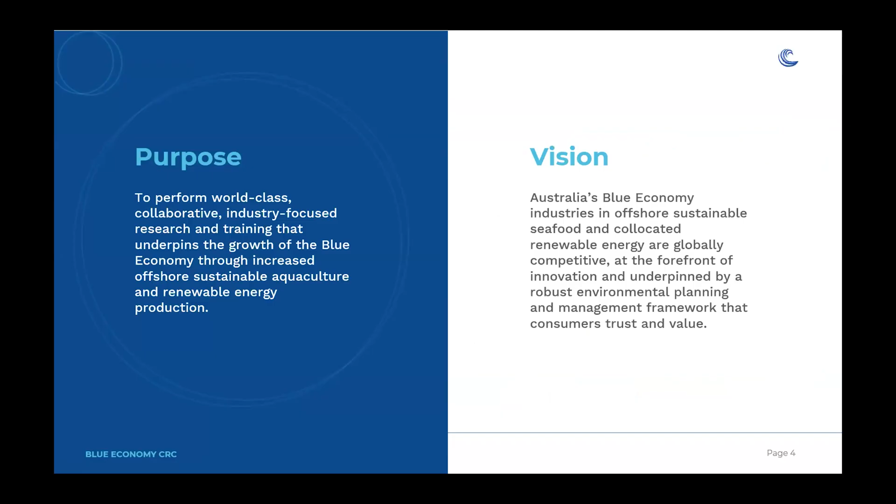Onto today's webinar. It's basically a rerun of 4 selected presentations from the European Wave and Tidal Energy Conference that took place earlier this year in Portugal. The EWTEC conference series has been running since 1993 and really is the premier biannual event on marine renewable energy that attracts developers, academics, as well as government from across the globe.

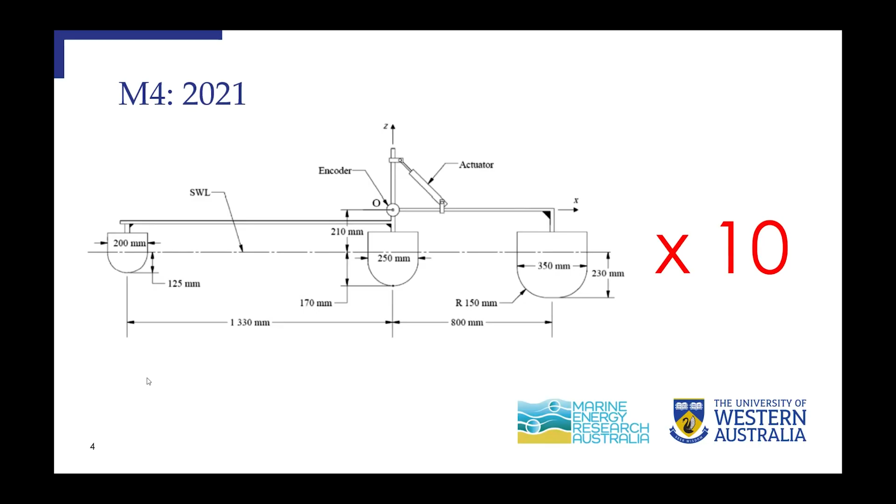So that's a bit of history. We started thinking about deploying an M4 reduced scale in real sea, I think in 2020. Then in 2021 the project was approved, the proposal was approved by the Blue Economy CRC. The idea was really quite simple. This is a sketch of M4, which was tested in the lab, and the idea was to scale it up 10 times and deploy it in the sea. Of course, along the way a few things have changed, but the main dimension remained the same. So that's how it looks like after some design iteration, before going to the sea, before it is built.

If you notice, we have actually made the float slightly taller. The idea is because we have a bit of a payload to sit on top of the device, and we want to provide enough buoyancy just to accommodate those equipments and power electronics and so on.

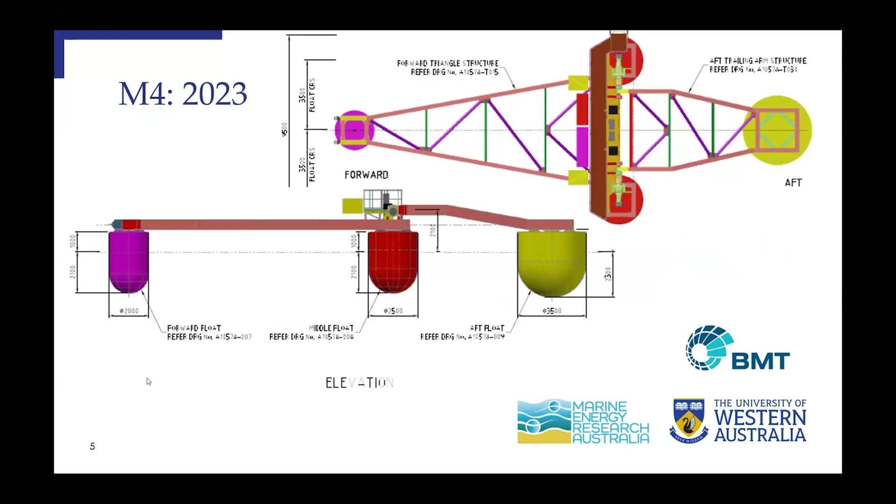Next is how the device looked like when it was constructed. This was at the time of launching. The total length is about 24 meters and the total width is about 9.5 meters. Some simplification also, if you notice here, instead of having rounded floats, we have it segmented in polygons, just to simplify the fabrication.

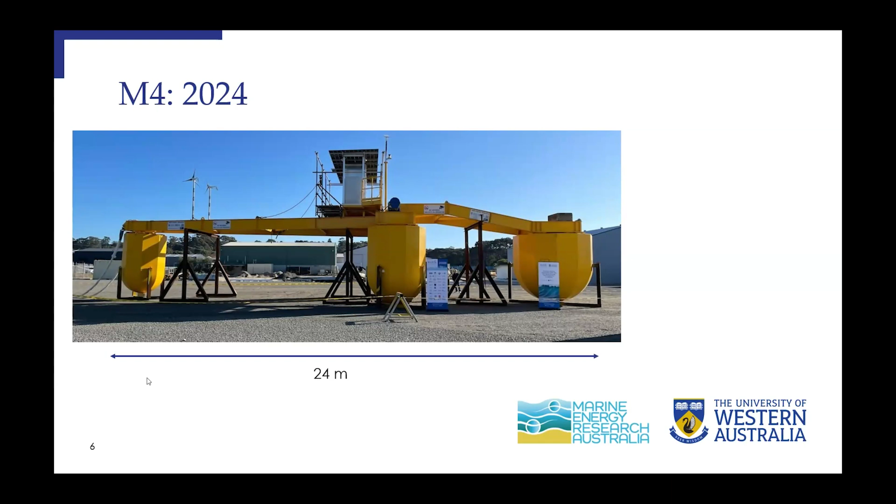So where was it tested? It was tested in King George Sound, at the outer harbor of Albany. And where is Albany? It is about 400 kilometers southeast of Perth. That's the map of Western Australia, and that's the location where it was tested. If you see here, it is actually protected by a headland.

So there is a thin strip of land connecting this peninsula to the rest of the continent. The water depth here is about 13 meters, so not very deep. And what is important here is that because of this headland, the site is actually sheltered from the more energetic swells from the Southern Ocean coming from the south, which makes it ideal as a test site for a reduced scale device.

So we are looking at a scale of about 1:5 to 1:10 relative to the more exposed site where you may want to deploy a full-scale device. And again, because it is protected from the swell, the condition is mainly dominated by wind waves, which come from the east in the summertime. So that's when we are targeting to deploy this device.

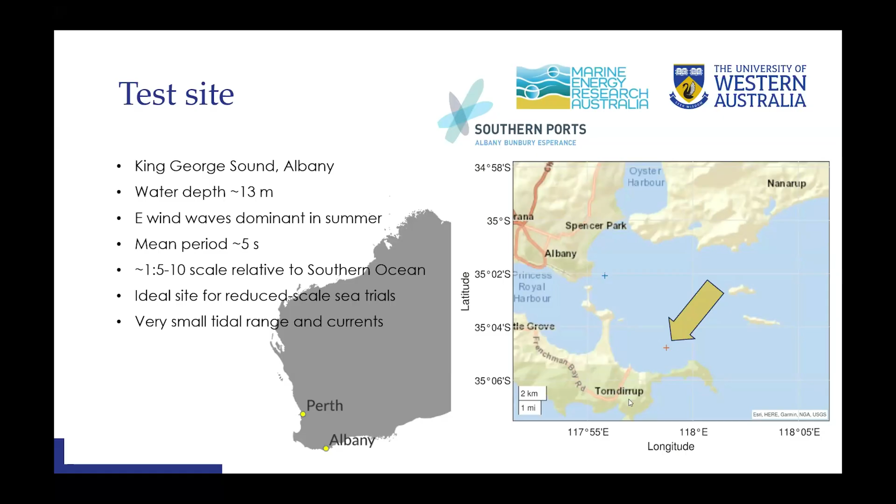So this is just a zoom in of this little section here, looking down. If you see here, there is a little island called Seal Island, and that's where we deploy the M4. It's just close to this island.

Okay, so the mooring system, it is quite simple. This is just a schematic, not to scale. So 2 hawser lines connecting the bow of the M4 to a mooring buoy, and then from the mooring buoy down to the seabed we have just a single riser, which is pretty long, and then a series of clump weights and 3 anchors.

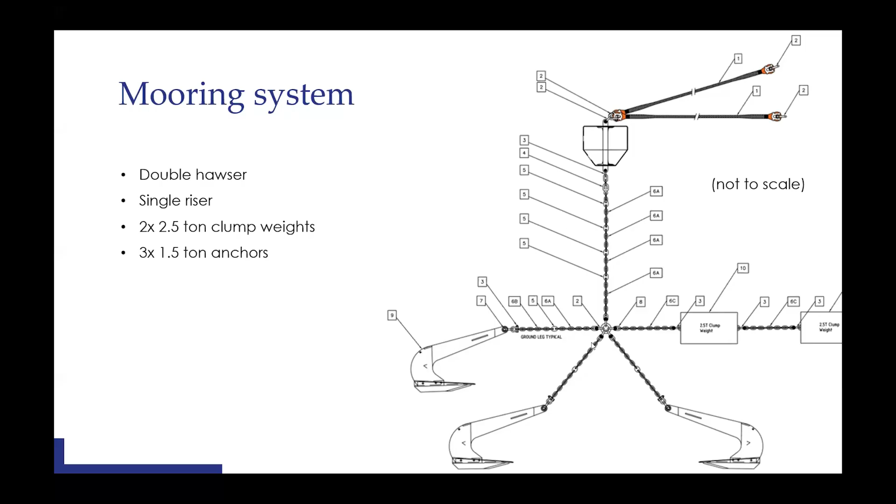Okay, so the timeline of deployment - roughly it was a year ago that we deployed it, so 8 November last year. And then we finally towed it back at the end of April this year. But 2 times we took the device back to shore to do some inspection and maintenance, though they were all pretty minor. The first maintenance we did was just to replace an encoder coupling, which was damaged during one of the energetic sea states that we encountered.

And then the second time we pulled it back to shore, it was to fine tune the measurement of the angular speed of the generator, related to the control aspects. But structurally, it was performing well and sound. The paper that we presented mainly focused on the first 2 deployments, from November to February. Most of the time, the power takeoff wasn't active during this period. Only at the 3rd deployment, which was the longest, did we try to generate and activate the power takeoff and generate some electricity.

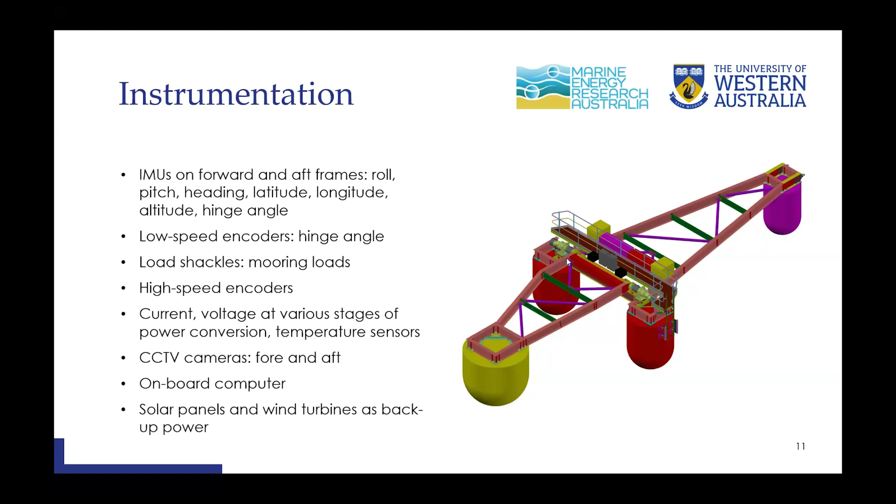We also have solar panels, which you will be able to see later on, and a couple of wind turbines just to supply backup power to power the sensors and so on.

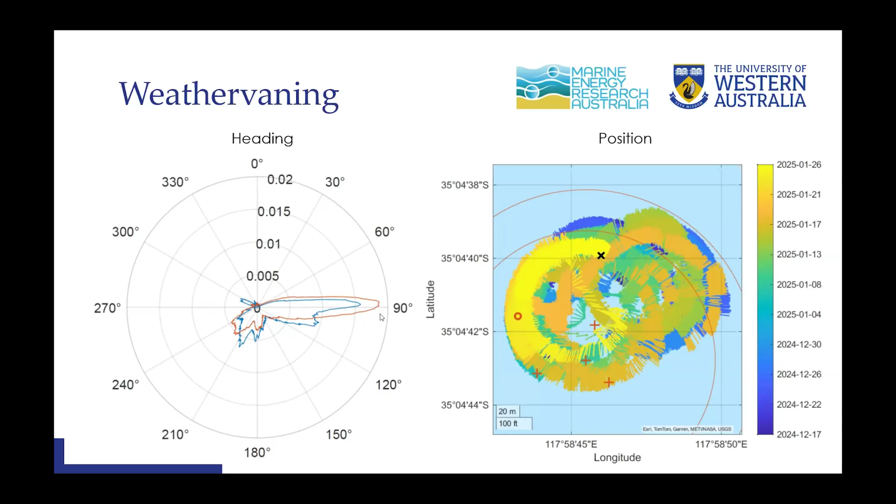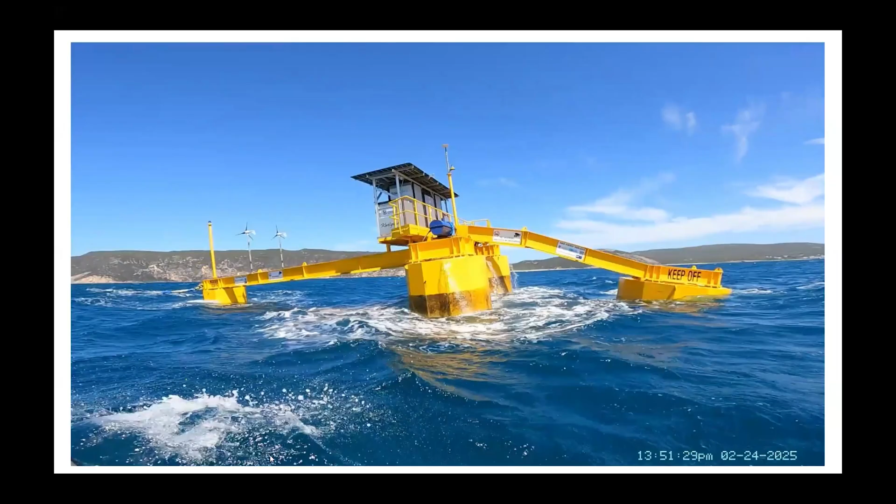So this is a video of the M4 in action. You see this, I mean, the condition was not particularly energetic, but still you can see quite a large motion there. And just the noise coming from the gearbox, which is pretty loud. You see here, the one in blue is actually the housing for the gearbox and the generator. And on top here, you have the solar panels.

And you can see the hawser and the mooring buoy in front. And you can see from time to time, the floats actually get slightly submerged.

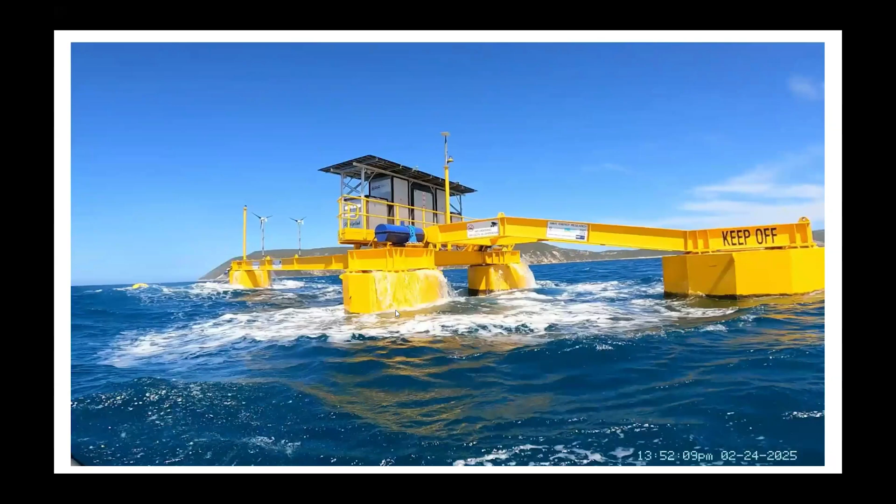Okay, so we have developed a model based on linear theory. We develop it in frequency domain, where we use a generalized mode feature to model the additional degree of freedom of the hinge. So this model is able to take spread forcing as input, and then outputs the motions as well as the loads on the hinge.

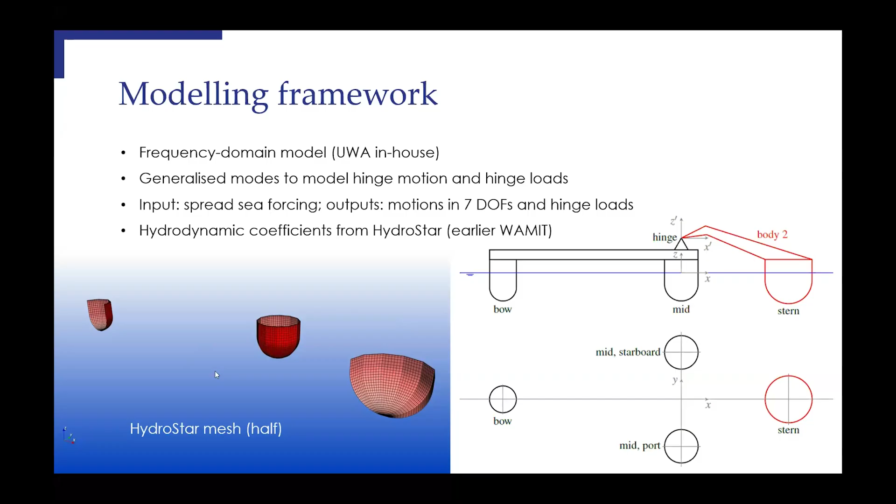This is just showing the mesh for Hydrostar, utilizing symmetry of the device. And we also conducted some tank testing at AMC in Tasmania, and these are just showing some comparison of the measurements we obtained from the test with the prediction from the model, showing quite good agreement for the motion response amplitude operators as well as the power function.

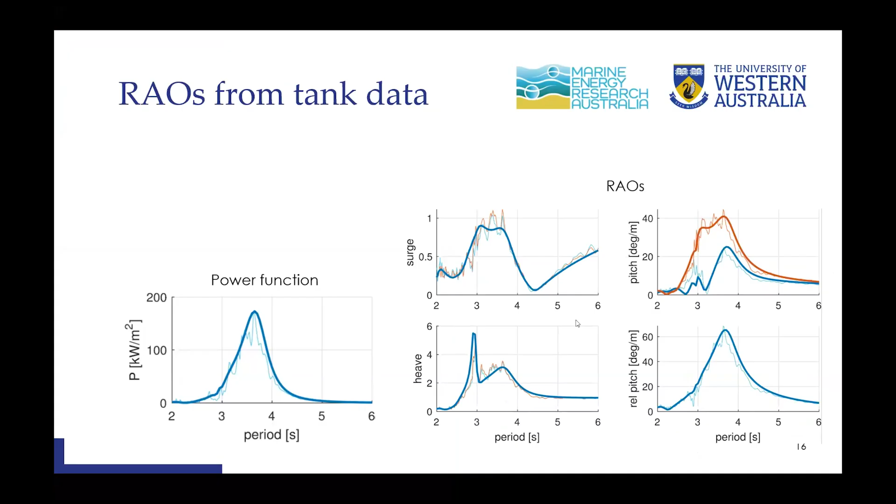But the question here is that we do not know the two-dimensional spectrum, because it is a function not only of frequency, but also direction. We do not know this from the field. We know the wave spectrum in 2 dimensions from the wave buoy. So we cannot actually obtain the RAO simply by utilizing this relationship.

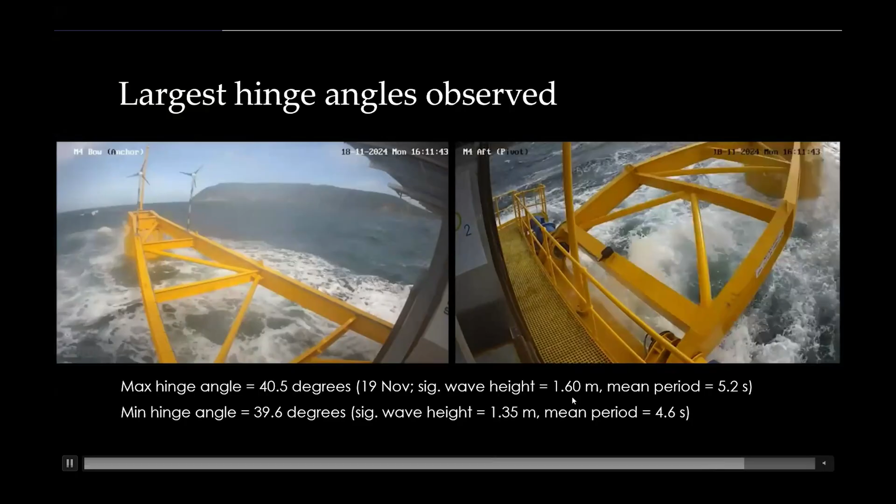Okay, this is some footage from the CCTV cameras. Yeah, this is one of the highest, actually the highest hinge angle observed, just 2 weeks after, well, less than 2 weeks after it was deployed. And you can see here the significant wave height is not really extreme, but because of resonance and the condition was just right to create such a large response.

So one time we had to call the tugboat to release this hawser. But I think another time when this happened, it managed to unwrap itself. But of course, this is not something desirable. So to prevent, well, we can't actually prevent that from happening at this point, but to prevent this rubbing against the float, we install some kind of sleeve to protect the hawser.

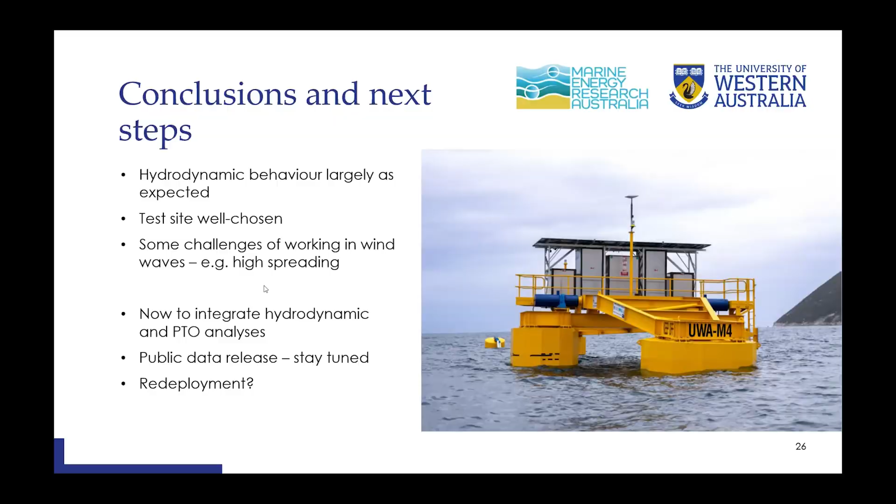Yeah, thank you very much.

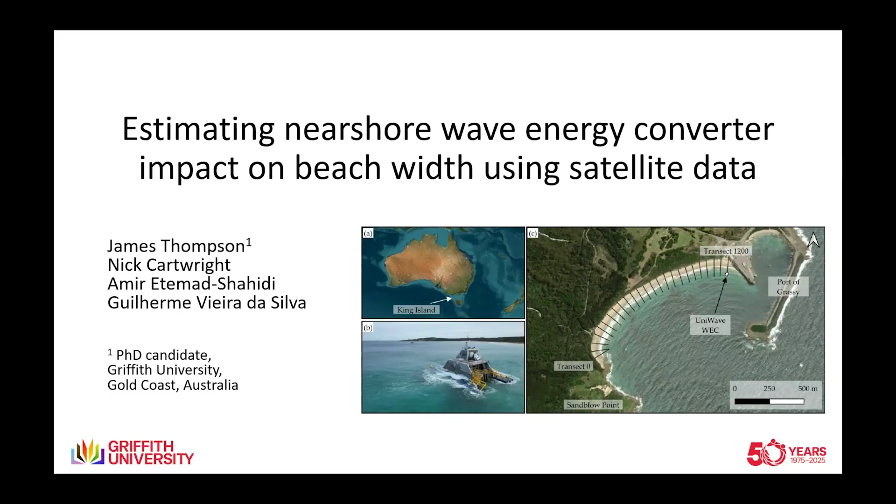I was lucky enough to present this in Portugal this year and learn a lot from all the other experts in Europe and in Australia and all over the world. And hopefully I can share some of the work from my team today with you guys.

So looking at the coastal processes along our coast is really important and how they impact our beaches. So this study looked to merge those ideas, looking at wave energy converters and their potential coastal impact as an important part of understanding how they might affect our beaches.

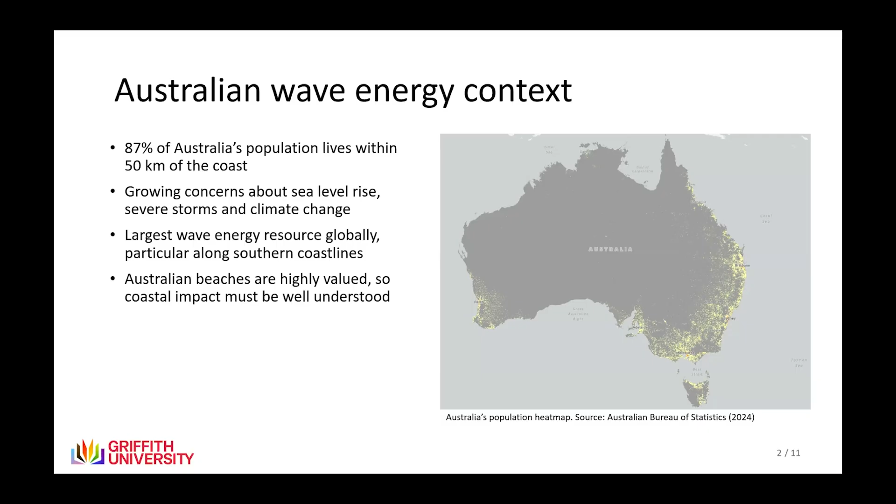We wanted to take that further and look at the potential effect on the beach, things like longshore currents, sediment transport, and beach width.

The review studies out there have quite differing opinions on this space in the field. Some studies think the impact on the beach is pretty negligible and not worth considering much further, as wave energy converters are really small at this stage.

Other studies have investigated wave energy converters as potential coastal protection structures, inherently suggesting they will have a significant impact on the beach, whether positive or negative for communities. So we wanted to get some measured field data, and found an opportunity in a recent Australian deployment to investigate that.

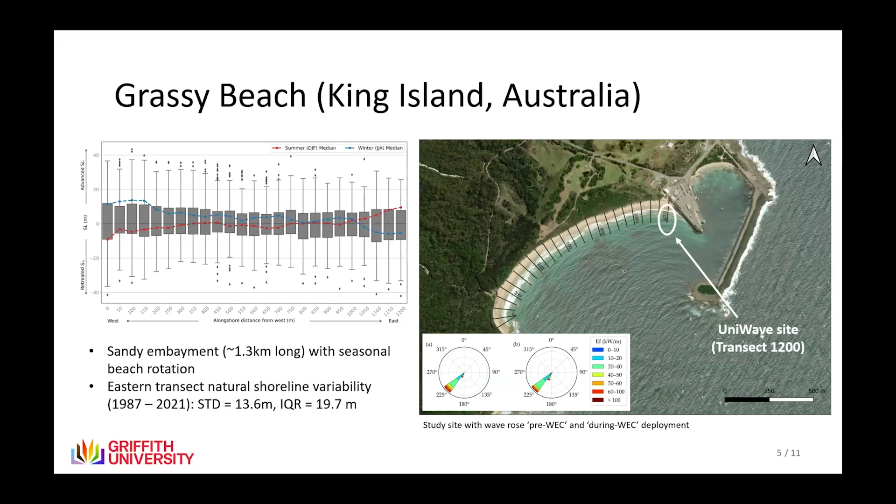A little bit more into the methods. Sadly, we weren't able to go down and measure this beach change in person - quite a costly place to get to with a PhD budget. But we were able to employ satellite data, which gave us a really good long data period from 1987 through to the present day.

With accuracy of about 7 to 13 metres of beach position, we used 556 images from September 1987 through to the end of the deployment in March 2023, to get a good idea of how the shoreline naturally varies in the pre-WEC period through to how it changed during the WEC period of 2021 to 2023.

Measuring the shoreline was done using a Python toolkit called CoastSat, and this looks at each pixel of the satellite image and distinguishes whether it's likely to be water, sand, or white water. By doing so, it's able to draw a shoreline along the beach.

As I showed before, we used 25 transects along the beach to get an idea of the cross-shore change over time for each position along the beach. And then for the transect of interest, the one behind the wave energy converter, we decided to do some detailed statistical analysis to compare the pre-WEC period to the during-WEC period.

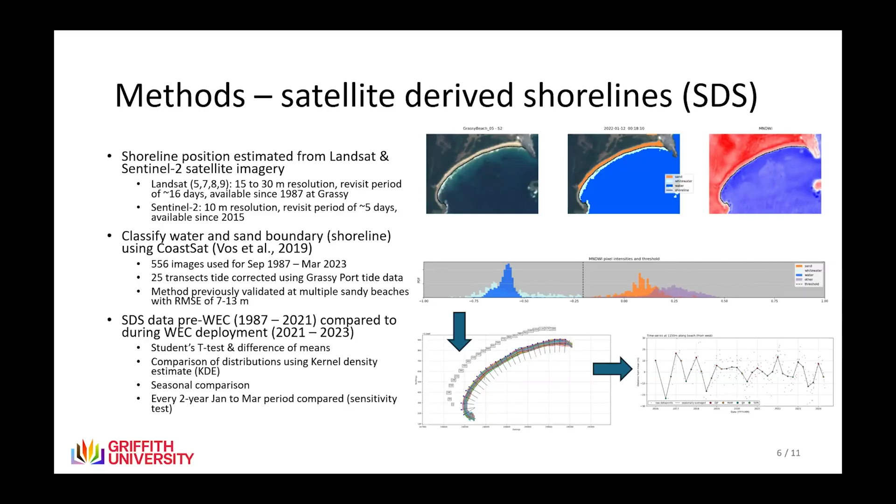Jumping straight to the end result, we did see an increase in beach width behind the structure, as one might expect with placing the structure in the surf zone. It was a 5-metre change between the mean of the pre-WEC period and the during-WEC period. So the beach became wider in that zone.

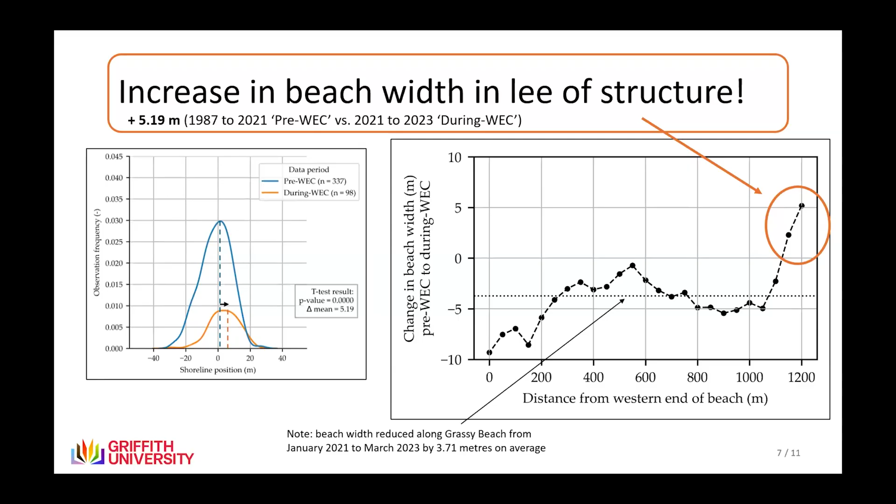We then wanted to investigate this at a seasonal scale. We know from the natural variability study that there is a significant difference each season in how the hydrodynamics affect the morphodynamics of the beach. But this result held up across all seasons, with all seasons showing an increase in beach width behind the wave energy converter, in particular compared to the rest of the beach, which generally became narrower during this 2-year period.

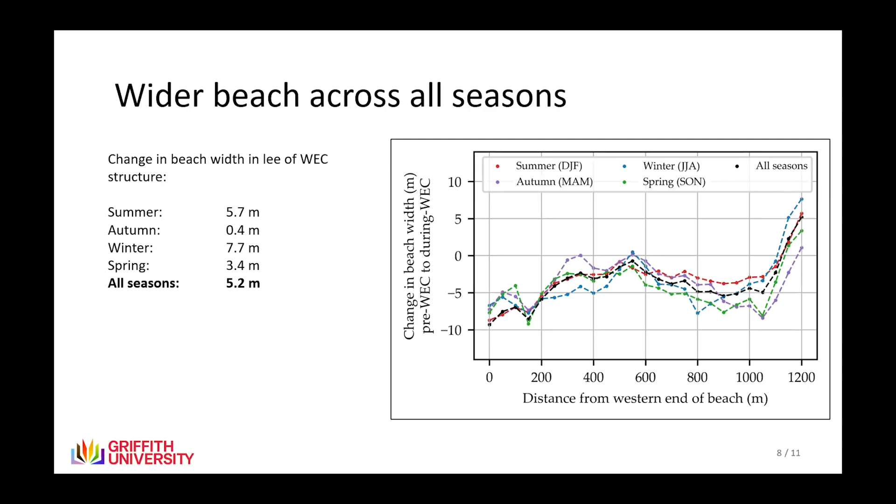We then performed the sensitivity analysis, looking at the different 2-year periods in that timeframe to see how robust this result was. We found all but one of the other 2-year periods had a narrower beach than when the WEC was in the water. This gave us more confidence that the wave energy converter was a significant contributor to the change in beach width.

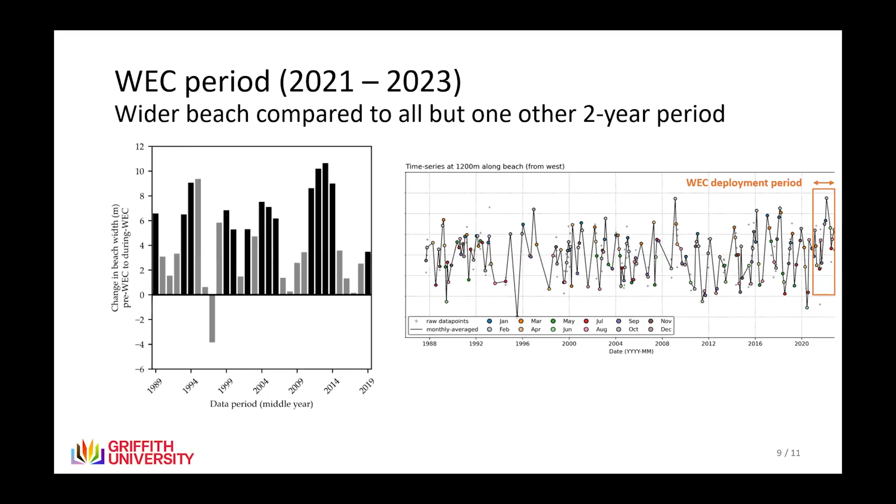I think the elephant in the room is that these results are based on satellite data. One of their big strengths is that we're able to go back so far in time and compare the natural variability to the more recent variability. But what they lack is a real detailed understanding of the coastal processes.

I think future research should really try and get in the water and measure some of these changes to the waves, currents, as well as the beach processes around them, using 3D hydrographic surveys and visualization techniques of coastal processes. Future studies should also start to look at larger WECs and how they might impact the coast using numerical modeling and other techniques. And then I think if wave energy converters are going to become a coastal protection structure, we need to understand how they compete with different options such as breakwaters or artificial reefs, which have a bit more research behind them.

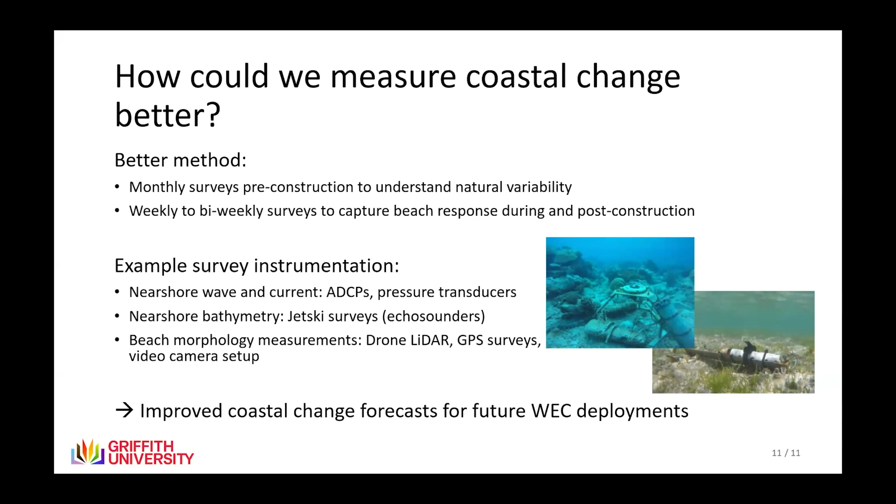What this would do is allow us to get better coastal change forecasts for future deployments, and improve our coastal models and numerical models for understanding how future wave energy converter arrays might be used for coastal protection, or might just affect the coast in general.

So that was a short version of what we presented at the European conference, and the papers are out there now for people to read. In summary, we looked at the UniWave wave energy converter's 2-year deployment period and measured an increase in beach width behind that device using satellite data. We hope future studies interested in coastal impacts of wave energy converters are able to get out there and do some more detailed bathymetry and topography analysis.

But really, we wanted to highlight that an important part of this was being able to compare it to the natural variability. So getting out there and measuring these processes before any device is put in is really important when you want to do a comparison study. Thanks.

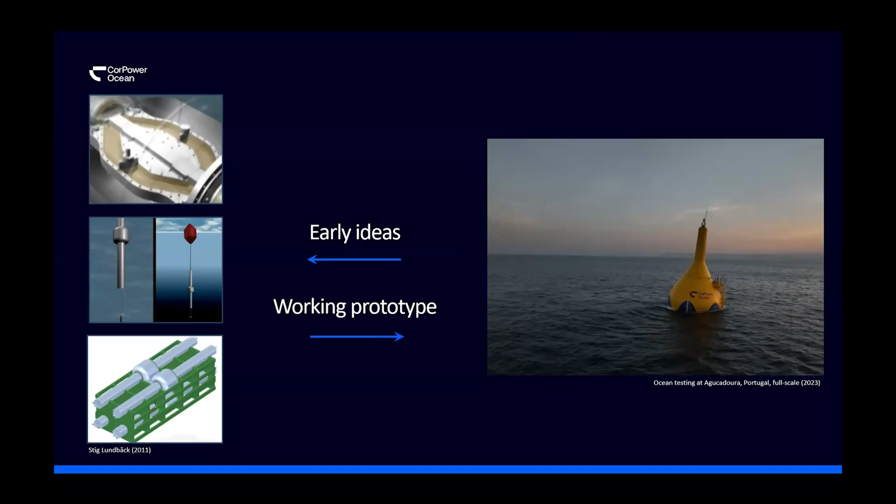So, looking at the development stages we've been through, taking us from the early ideas and seeing how, in our case, they have been evolving over the years—the last 13, 14 years since the first activity in the company. You see here some early pictures or drawings, and then the device as it looks today: the full-scale demo. I'll take you briefly through the main properties of the system.

You can see here through the whole water column the different parts. We have a composite hull which contains all of the machinery, most of which is connected to the part that is not oscillating—sitting at the mooring part. Then there is the mooring itself, which is a tension leg type of mooring, constantly tensioned by a component inside the hull.

There's also a tidal regulator which we use to adjust the length of the mooring. Then there is the power cable, routed through the mooring and coming off by the anchor head, and then the anchor itself, which is a pile anchor type, looking like this.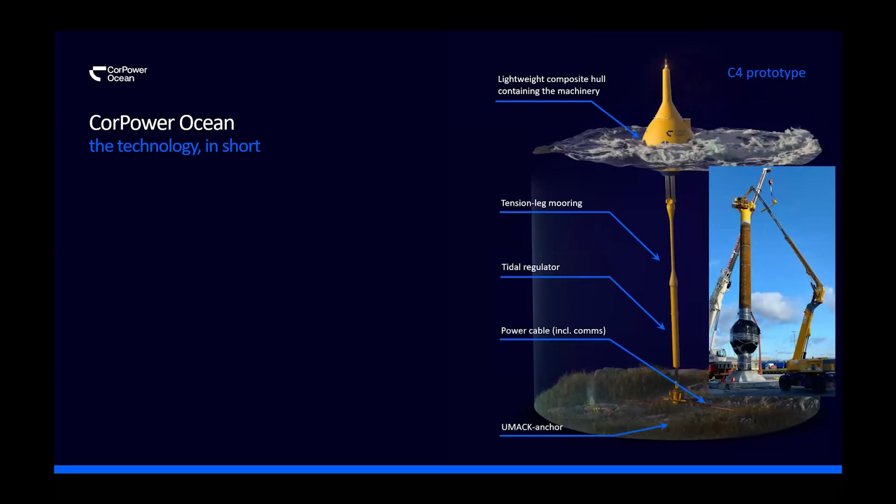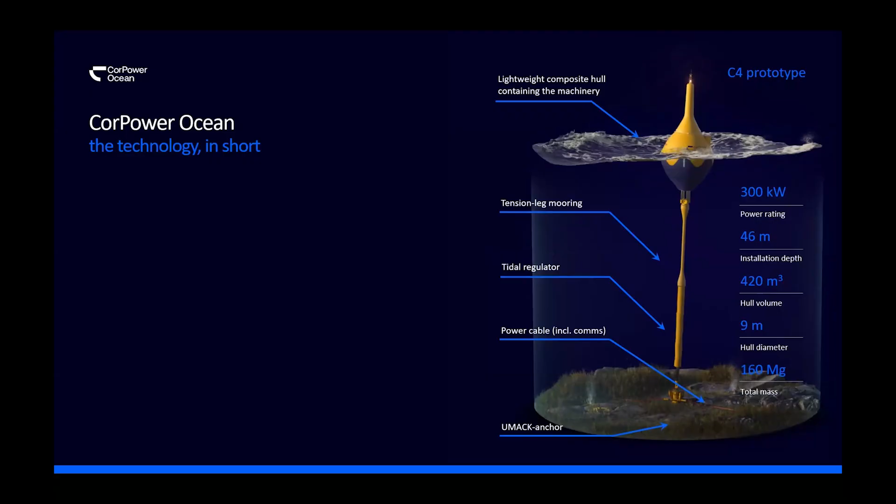The core data for the device are listed there: rated at 300 kilowatts, the depth where we demonstrated is 46 meters, total volume of about 420 cubic meters, 9 meters in diameter, and total mass of the system about 160 tons.

And then looking inside, I'll go through the governing subsystems that are most important for the functioning of the device, starting with the pretension system, which is used to establish the equilibrium position.

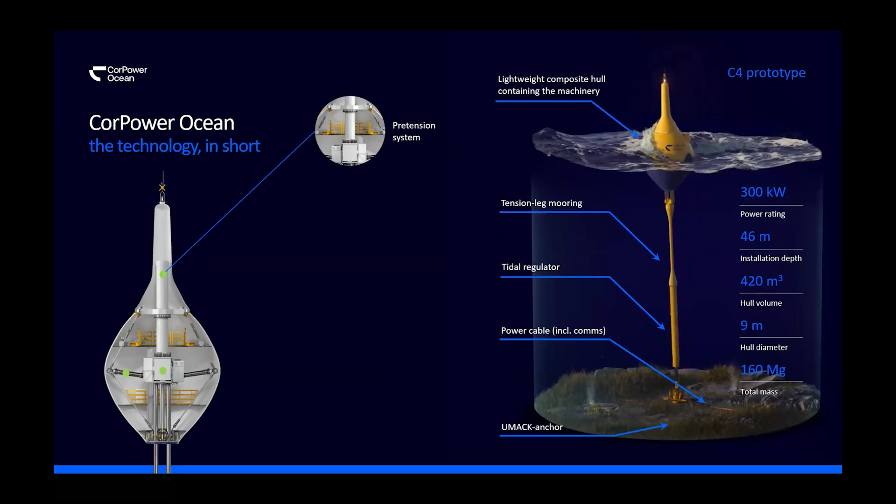It's a very light buoy, so the oscillating part floats naturally, more like a cork, and then it's pulled down to establish equilibrium by this pretension system, which is a pneumatic cylinder, the long white part there. And then we have the wave spring mechanism, those horizontal cylinders used to tune the system.

So that we interfere with the waves in the best possible way, to make the power flow from the waves into the mechanical system. And then there's a gearbox which has been designed, a bespoke design for this technology, converting the motion from linear translation to rotation.

And then the fourth point on that list would be the control algorithms that we apply, which is of the model predictive control type.

And then also the company itself, in short: it's a company established to develop and deliver turnkey wave energy systems. It started in 2012. We now have offices in Sweden, a small office in Norway, a large staff in Portugal, and 1 or 2 persons, I think, in Scotland. The goal is to make cost and material efficient technology for this.

It has received broad backing across Europe and has been supported by 150 million euros in funding so far, split between public and private funding. There's also, at the moment, more than 79 million euros in the form of intention agreements with future customers. The company today has about 95 employees.

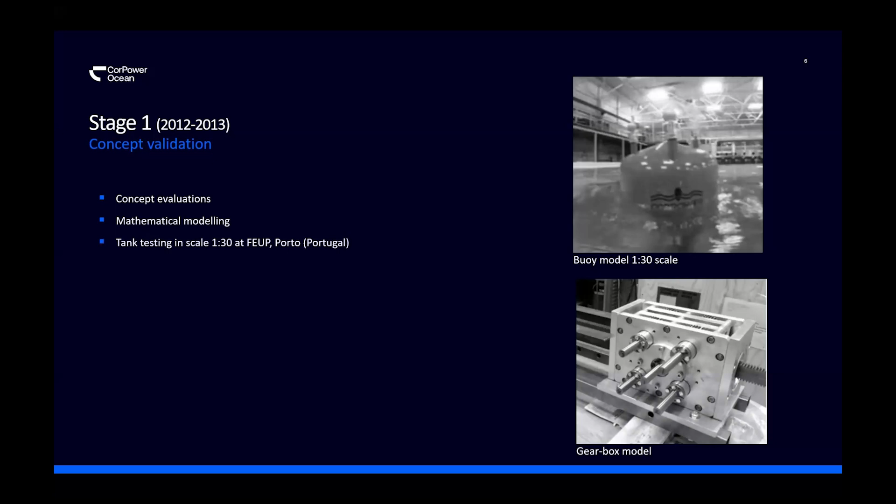I'll give a couple of pictures and some points on the work done during that phase: the early concepts and evaluations, comparisons between different identified solutions. Mathematical modeling was used to estimate the power output we could get and the loading. We did some tank tests at 1 to 30 scale, also in Portugal, actually in Porto, close to where we're demonstrating now.

There was also a small bench test of the gearbox, which was a core component of the technology. So it very much started with that, the whole company - that was an early endeavor, along with some evaluations of different buoy shapes.

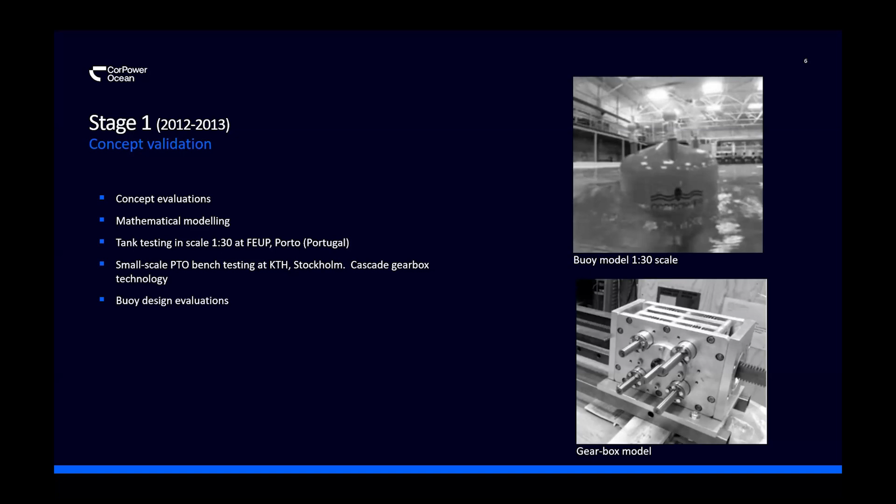I think that summarizes the first stage. I want to emphasize, as was mentioned by Adi, that we have tried to follow this performance-before-scale-up strategy, advocated by Jochem Weber in a series of publications, instead of what has often been done traditionally, which is to start moving along the technology readiness scale.

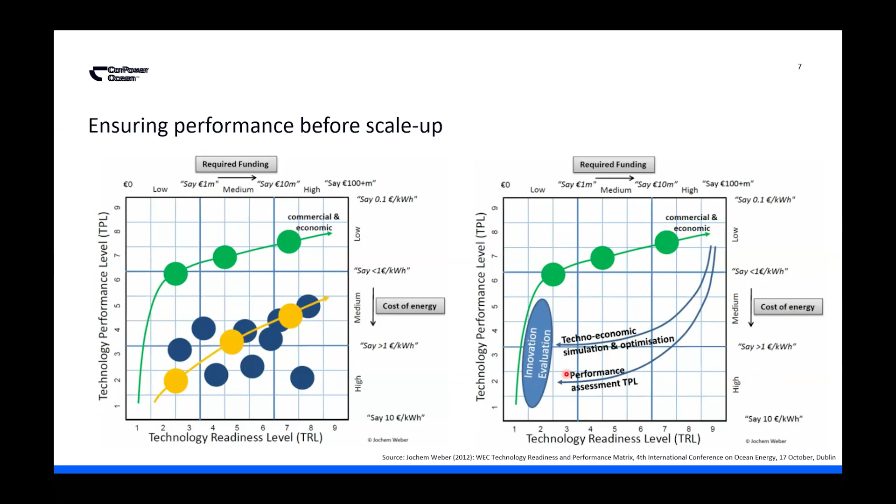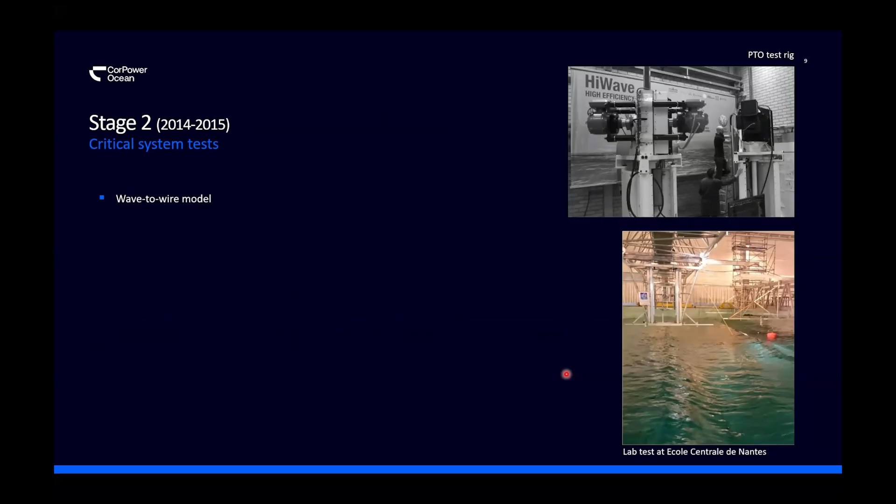So that has been the path forward for CorPower Ocean. Moving to stage 2: that was a couple of 2-3 year process where we developed a more complete, detailed wave-to-wire model, which has been crucial in all the designs. We used that a lot to look at loads and guide the design of the different subsystems.

We did tank testing again at 1 to 16 scale, this time in France. We also made a dry test, the PTO dry test - not the full machine, but still focused on the gearbox - tested at 1 to 3.2 scale in Stockholm, 5 kilowatt power capacity. And the wave spring mechanism was introduced, which I mentioned in the overview at the beginning, as part of the tank test to evaluate its effect.

A lot of effort was put into improving the economic modeling, informing the techno-economic metrics we derive, to look ahead at whether this is a worthwhile activity. So I think that summarizes stage 2.

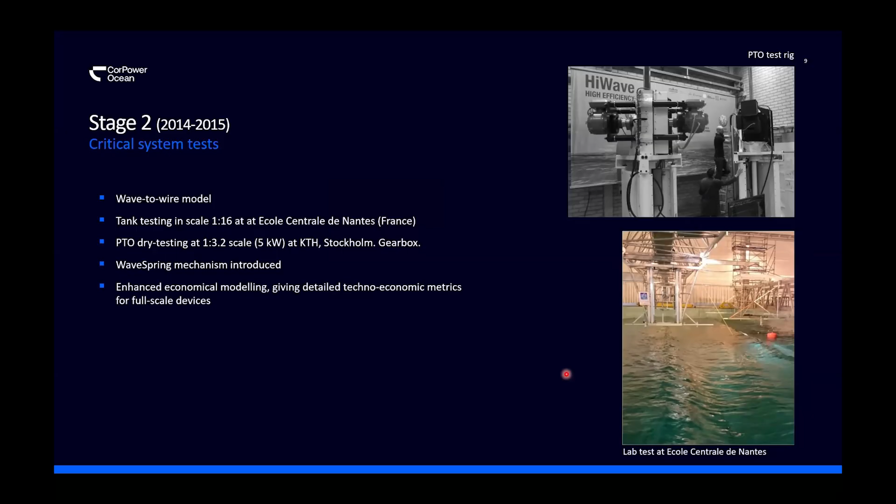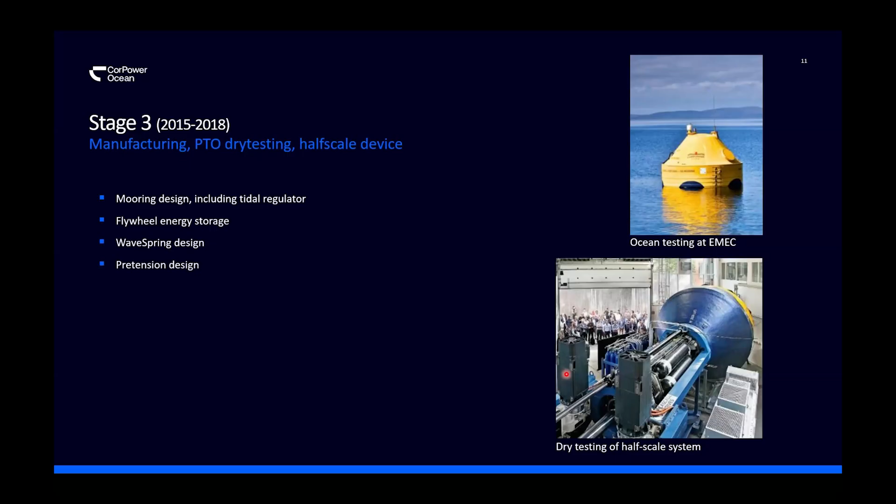Let's try to move a bit quickly here. Stage 3 was the half-scale device. It contained mooring design, so now we had to relate to the real world. Tidal regulation was included. We had flywheel energy storage at that time, and wave springs, so the mechanism was designed for real for the first time, same with the pretension system. Everything was manufactured at half scale, and a new test rig was built for dry testing.

I think the idea has been to try to test all the components at the smallest relevant scale. So we have done a lot of dry testing, but some things are not easy to test realistically if you make it too small. So yeah, always this dry testing, which has been important.

And then the ocean testing itself, which happened at EMEC, Scapa Flow site. The dry testing in Stockholm was grid connected. The actual testing in the ocean was not. It was a standalone system.

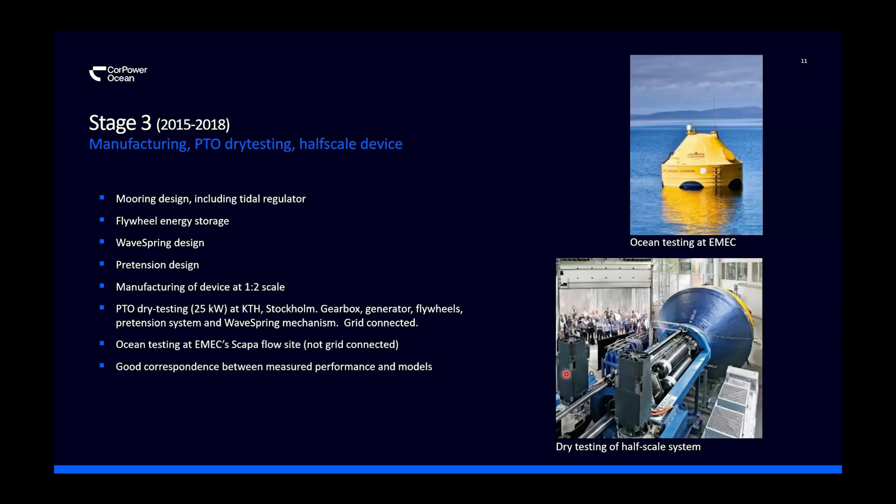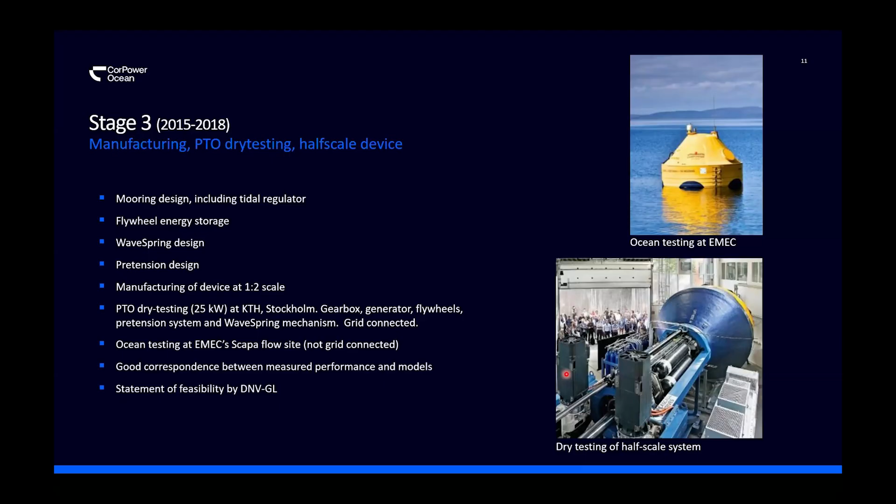We then calibrated our wave-to-wire model, and then we could see that the understanding seemed to be good - good correspondence between what we measured and what we simulated. Also working with DNV from this stage, the testing was done with a statement of feasibility for the half-scale test. So yeah, that was stage 3.

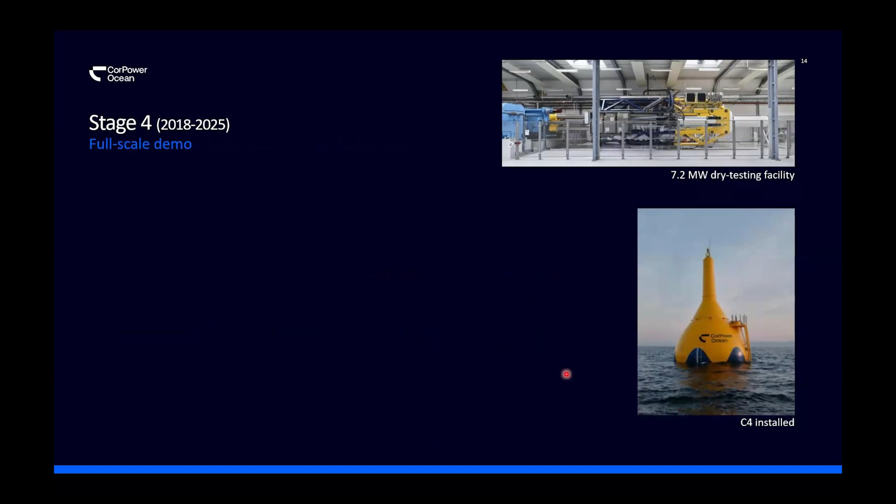Moving to stage 4, that's a full-scale demonstration, which we started working on in 2018, and we're still not fully finished with that stage, but a lot of redesign and modifications compared to the third stage. So the hull, mooring, anchor, pretension system, wave spring, gearbox, generator configuration - all that was changed to simplify, make it robust, moving towards industrialization, which is the point, but it's in the long run.

And we did here also several tank tests at 1 to 20 scale. We had challenges with the mooring solution, which made us do a lot of tank testing to be sure that that was feasible. And again, scaled up the dry testing in Stockholm.

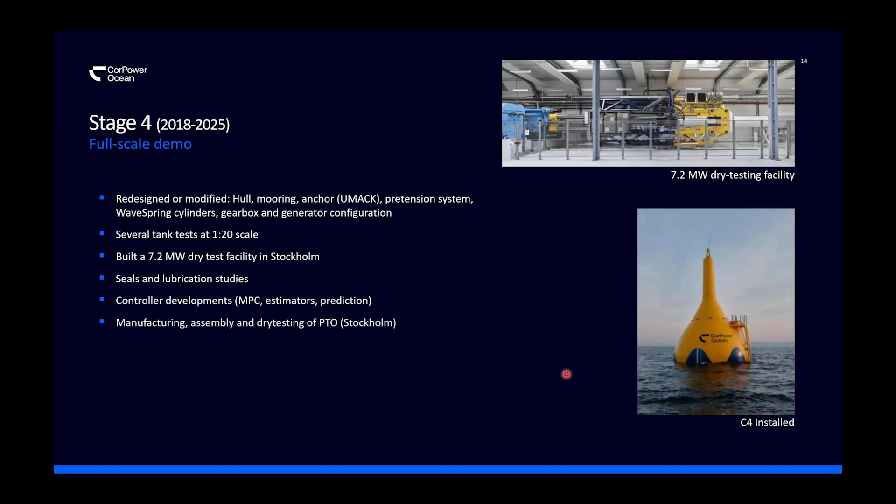You can see a picture there, top large dry testing rig. Also a lot of testing of seals and lubrication, controller developments, manufacturing, assembly, and dry testing of the PTO happened in Stockholm. And we manufactured the hull in Portugal and the mooring leg in Norway.

Demonstrated now for the first time then grid connected operation in the ocean, and also went through a couple of large storms.

The anchor solution was kind of validated to be feasible and efficient. Good correspondence again achieved between our models and what we measured. A lot of experience in the marine operations, and both improvements happened and identified for the future.

And continuing the collaboration with DNV towards type certification, which is the goal then to enable commercialization in the end. So that has also been an important alliance, you could say, or cooperation to get proper feedback from a competent body.

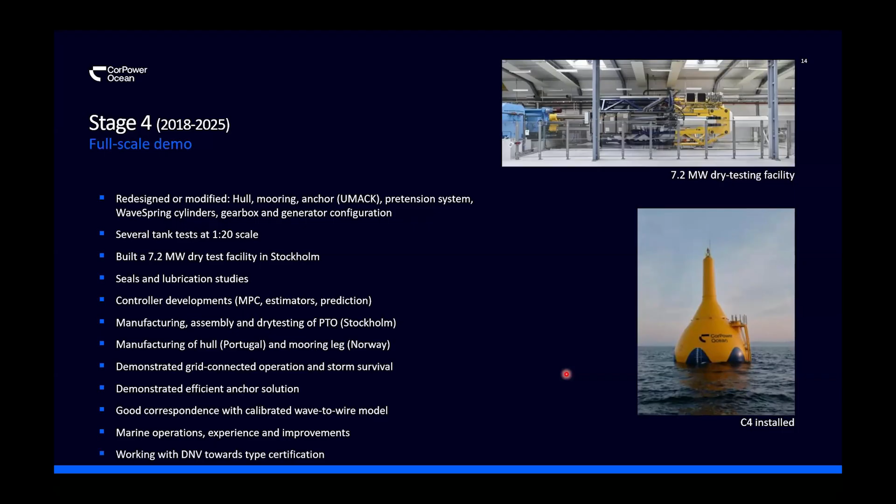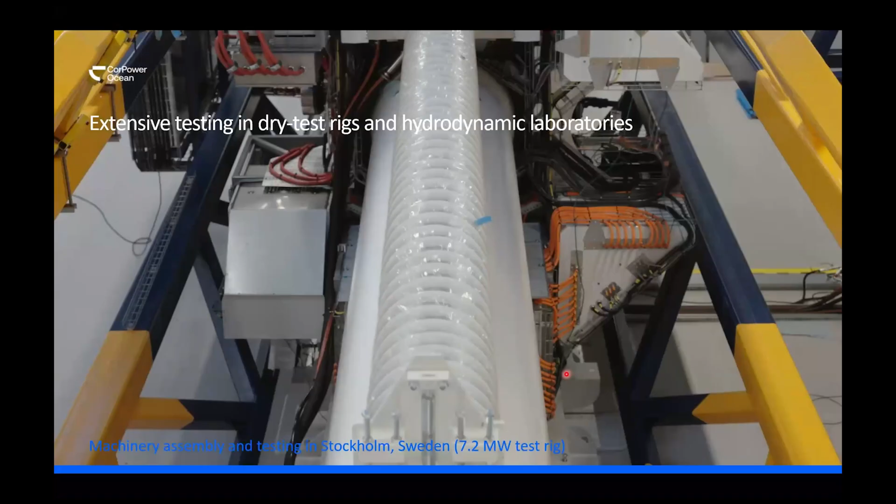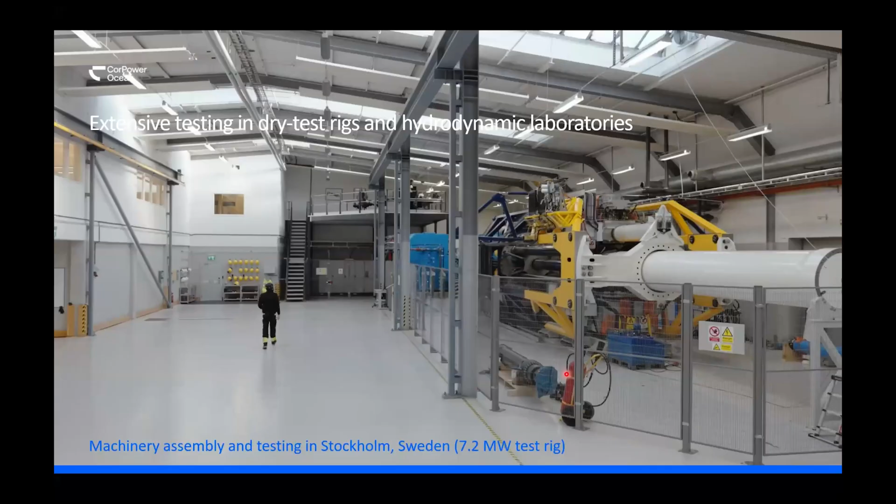Just showing a few videos and pictures from then the stage 4. So this is the dry testing rig in Stockholm, where we imposed then the same loads to the machinery that it will experience at sea. And it gave the opportunity to mitigate problems and solve software bugs. And without this, we would have not been there anymore, I think.

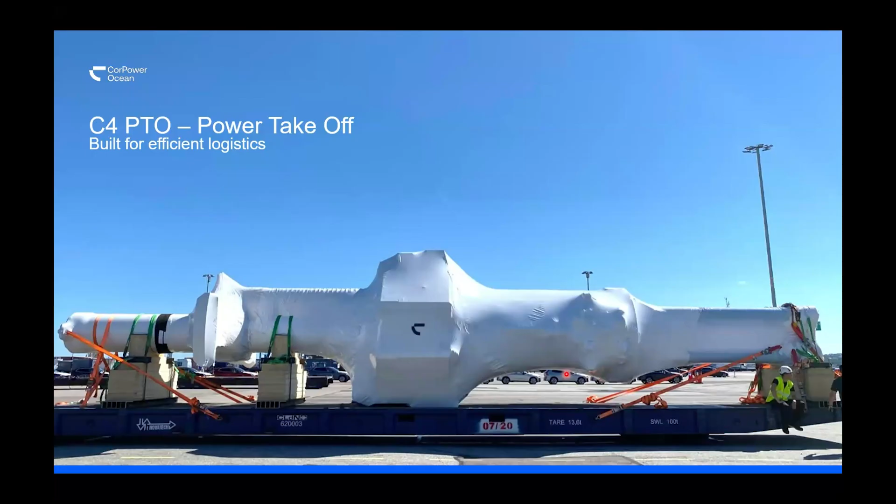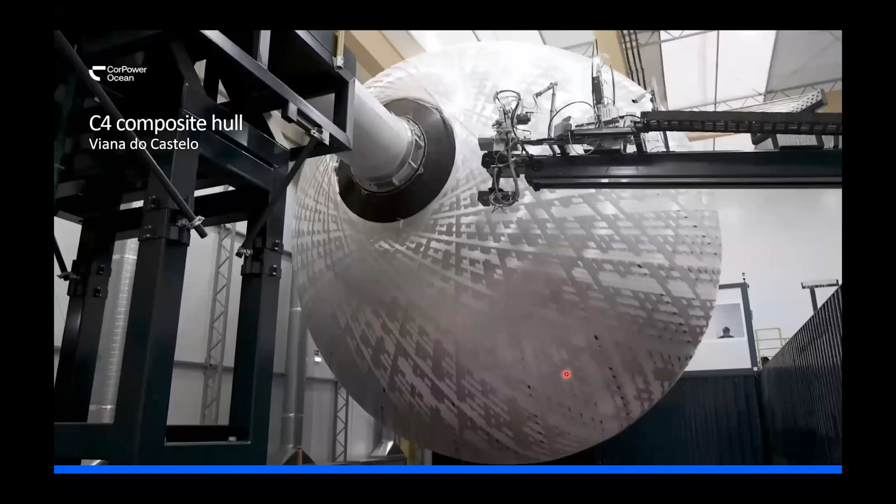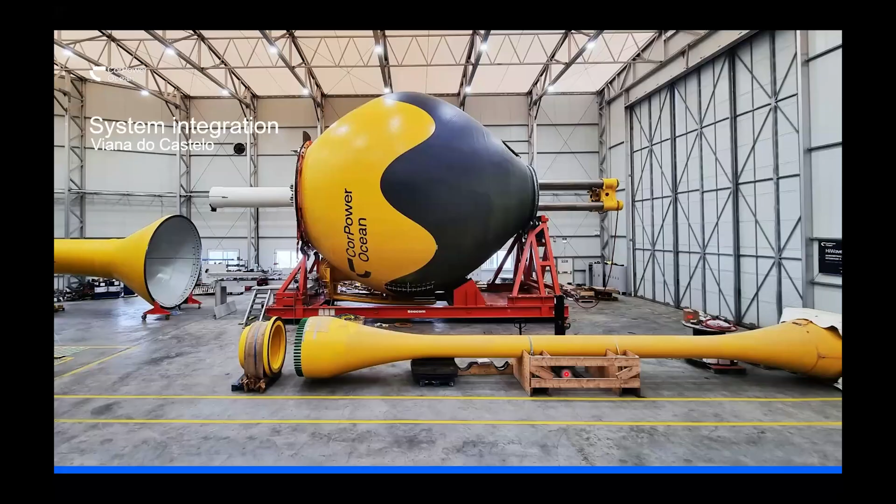And then the manufacturing of the hull, which we do in the machine hall in Viana do Castelo, close to where we have it installed. Here you see the different parts with the PTO then moved in and then connected to the hull, and the mooring leg there in front.

Yes, so all in all, after these 4 stages of development, we still think that we have a solution that can set a new state of the art for wave energy.

So comparing to this study that is starting to be a bit old from Aurelien Babarit and co-authors from 2012, it was a cross-device comparison to look at some performance indicators, so used mass compared to energy output. So when we compare to that, we see that we score more than 5 times better than what was observed in that study on annual energy per ton.

And we also see then that we think we can overtake the numbers seen for floating wind turbines. So we are at less than 300 tons of total mass per megawatt installed.

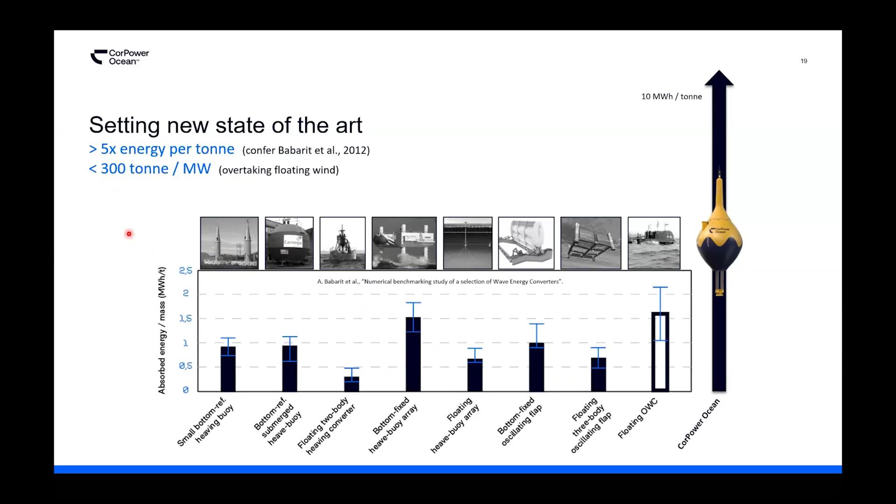Yeah. So and now we are in the phase of making the design for the next stage, where we will test a small array of 4 more devices, and it will happen in the same place than in Portugal.

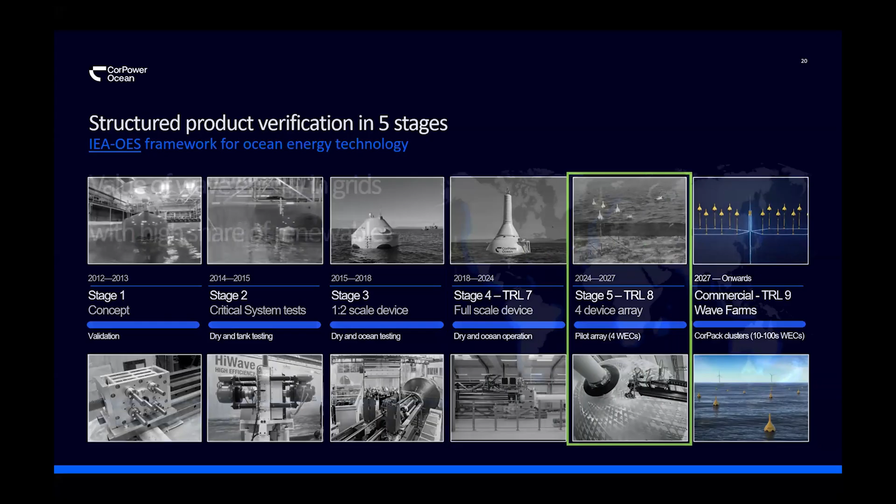So I think with that, I'll just use the rest of my slot here to talk about a study done by Shona Pennock, my colleague at CorPower Ocean. So this is a similar study that she presented at EWTEC for Madeira, but it's comparing, or it's looking at wave energy as part of a renewable energy mix in 4 different parts of the world, to see how the different renewable sources play together in a grid where you aim to reach high levels of renewables.

So it has a combination of onshore wind, offshore wind, solar energy, and wave energy combined with storage. And this assumes battery storage to enable continuous supply of power.

So this slide might be a bit confusing at the beginning. Let's focus on the Australia side. You see one site in Portugal, then in Scotland, and one in California in the US, and then south of Melbourne here in Australia - the 4 sites.

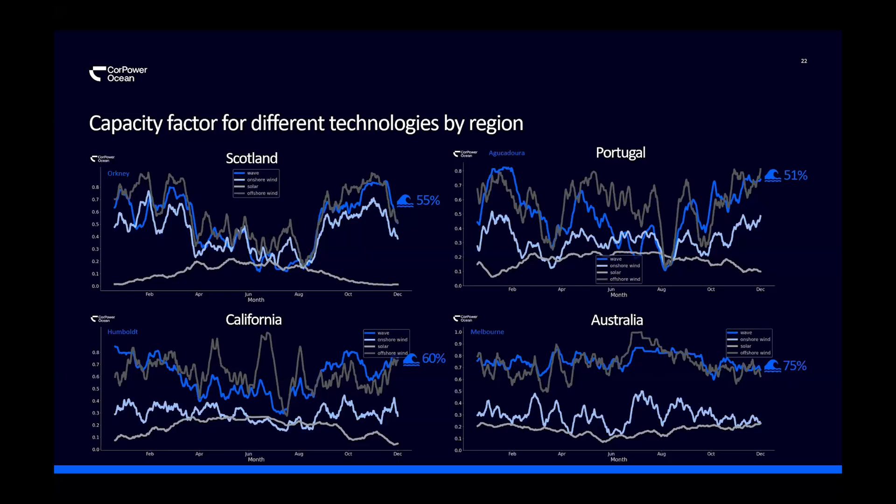So the study was done in a way that first made an optimization of how the renewable sources best can be combined if you don't include wave, and then the same optimization if you include wave. And then we find that consistent for all these sites - we can take Australia as the prime example because it has extraordinarily good numbers for this. You can see that you can both reduce the

necessary installed capacity. So we assume that we want to achieve a renewable energy share in the grid of 95%, so 95% carbon-free energy, and that could be done. Then with wave, you reduce the needed installed capacity by 43% for the Australian site here. At the same time, you reduce the levelized cost of energy and the need for battery storage.

So it's a strong case for wave energy in all these sites, and in particular for Australia. It's almost astonishing. And I think it's consistent with all the studies on this, but it's good to repeat, especially talking to an Australian audience. And of course, this is based on

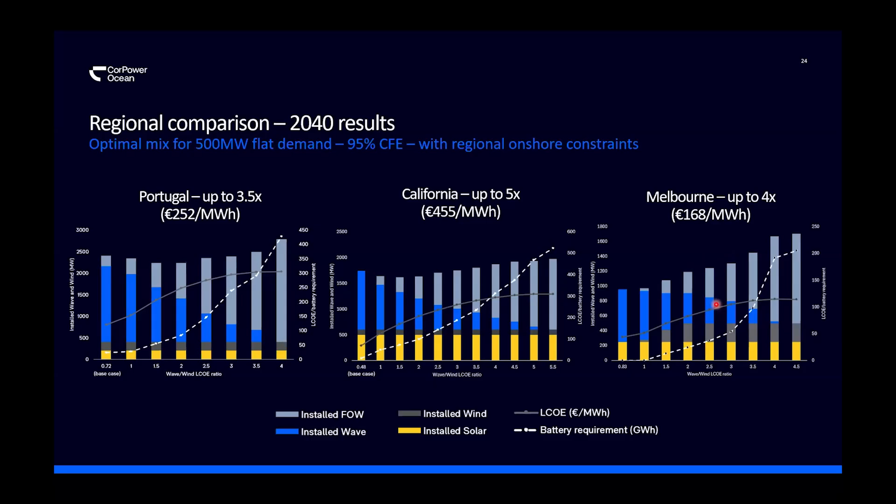And then we see, even if the cost of wave energy - again looking here at Melbourne - even if the energy cost ends up being like 3 or up to 4 times larger than we think, the optimization picks up wave energy as part of the mix and says that you should put wave energy in there. Thank you.

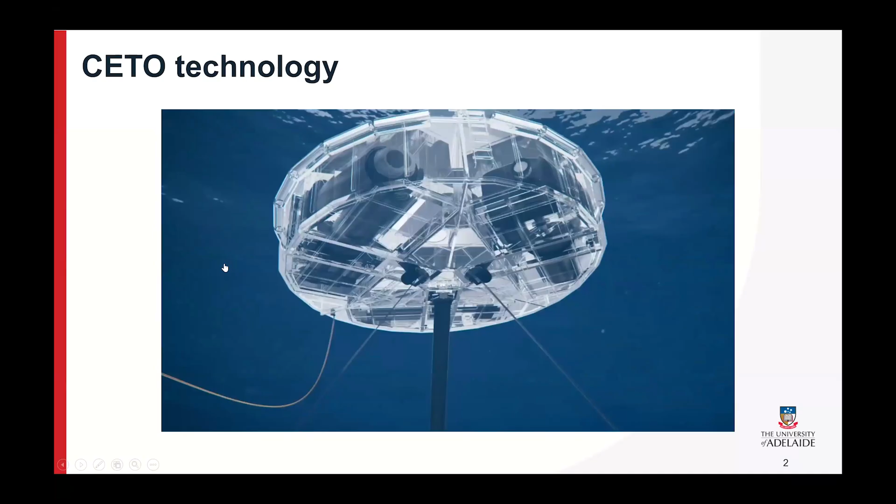So for people who don't know what Carnegie technology is, it's a CETO technology. It's a buoy which sits underwater a couple of meters. It is connected to the seafloor with 3 mooring lines, and each mooring line is connected to the rotary power takeoff system and then a generator. So the buoy's motion is pretty much converted to electricity with 3 generators.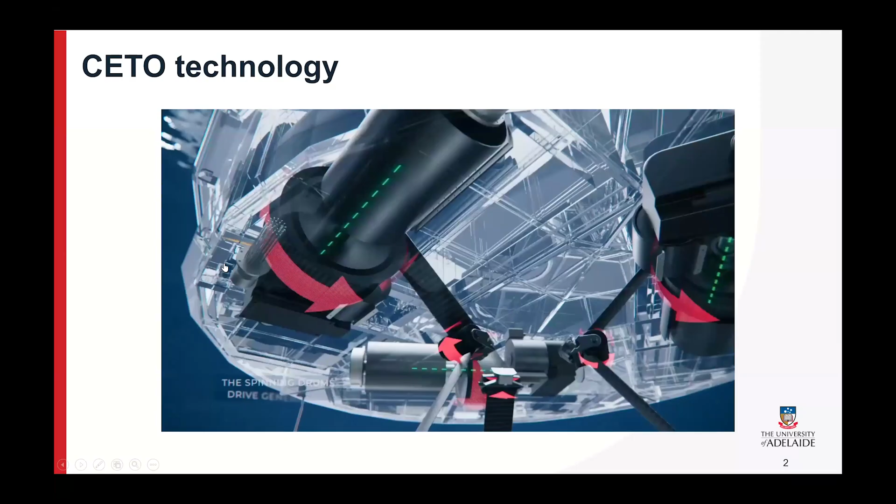It's a nice video, so I'll keep showing. The problem that we had before deployment - when you have a device in the ocean, you want to control it in such a way that you can maximize its power production, electrical power output, and it's usually done by some advanced controllers like a model predictive controller or reinforcement learning controllers.

And those controllers require information about the incident wave, which is coming towards the buoy. So in order to build the controller and maximize power production, we need to know the surface elevation. But of course, surface elevation is not known perfectly - we need to predict it, we need to measure it, we need to predict it, and so on.

The question is, if we want to develop such a predictor, what should be the requirement for the wave elevation prediction so that power production stays within satisfactory boundaries? What is the correlation between electrical power output and wave elevation prediction?

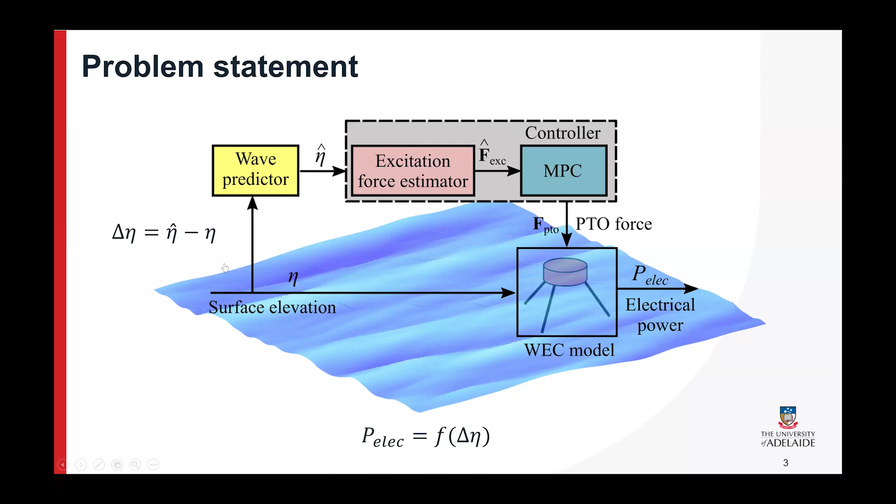This study was done purely numerically. As plant, we used the CETO system. The controller was a model predictive control. In this study, we haven't varied MPC parameters; they were fixed, like prediction horizon and some other parameters, optimized based on previous performance. For the numerical model, we used the wave-to-wire model built in WEC-Sim, which accounts not just for hydrodynamics, but also power takeoff dynamics, drivetrain dynamics, and losses on the generator side.

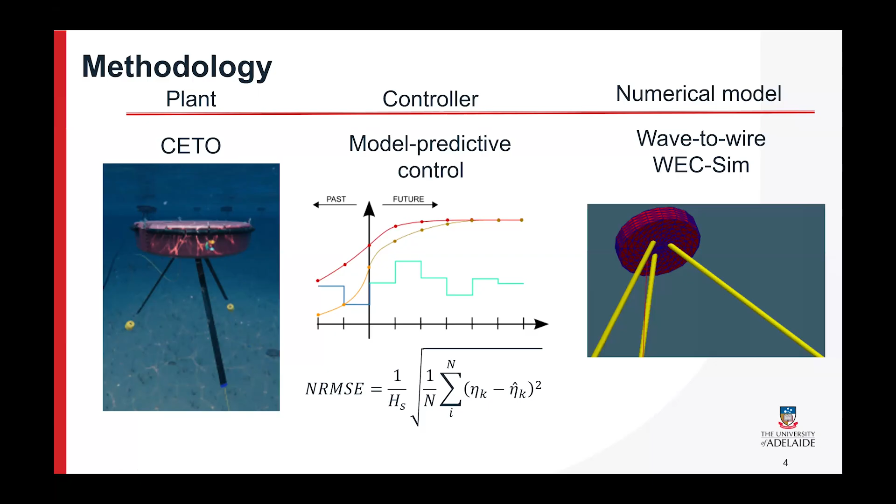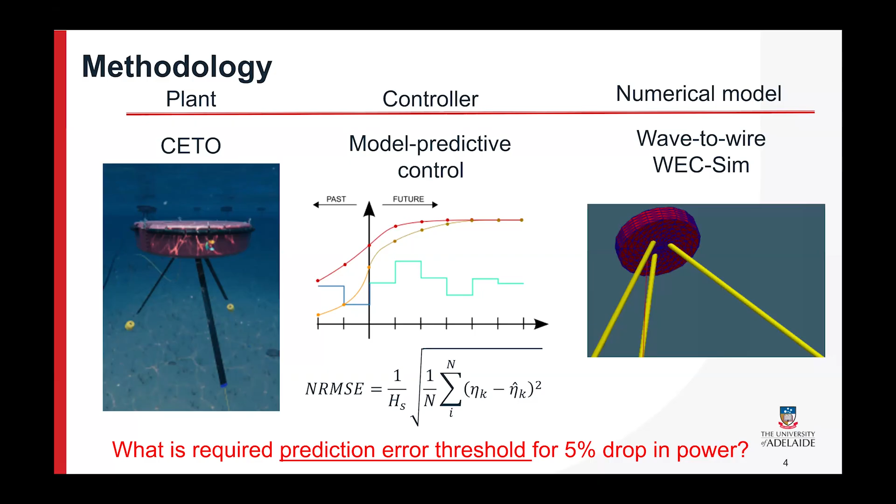For the performance measure, companies and researchers who develop predictors work with a measure called normalized root mean square error, which is the root mean square error normalized by the significant wave height of that sea state. The question was to come up with a prediction error threshold allowable for a maximum 5% drop in power. That 5% figure came empirically from company technical requirements, and I needed to derive the wave prediction requirement number that could be given to wave prediction developers.

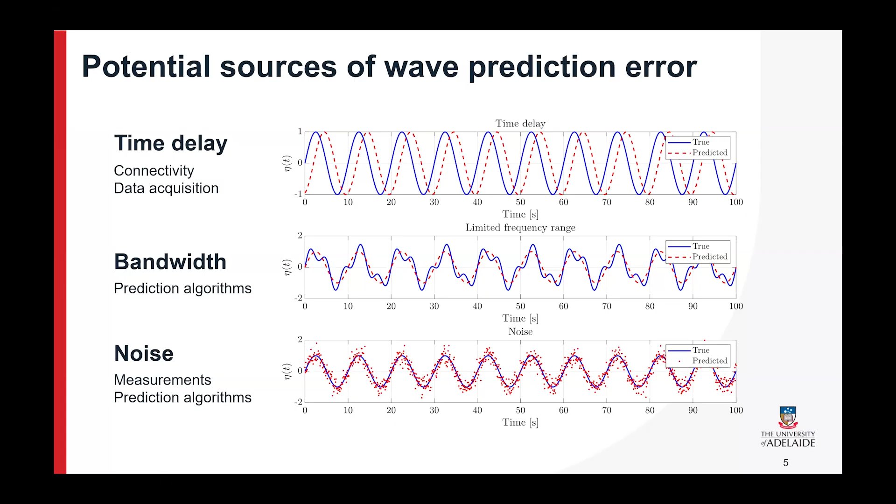We have a problem, but we need to model the wave prediction error somehow. We came up with three possible sources of wave prediction error. The first is time delay, which may not come from the algorithm itself but from connectivity or data acquisition issues. The second source is bandwidth, mainly coming from the prediction algorithm itself - the predictor accurately works within particular wave periods, but outside that band it doesn't predict perfectly. The last source is noise, which can come from either measurements or the prediction algorithm itself. These are the three sources of error, and we did detailed sensitivity studies.

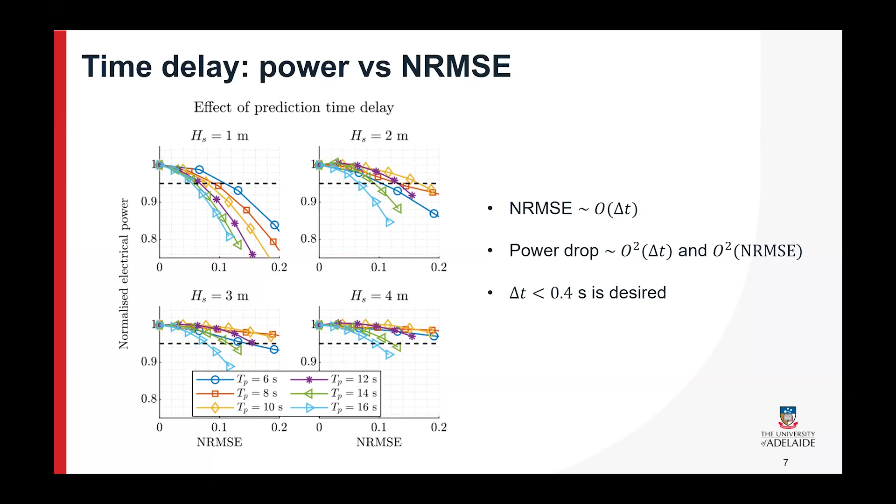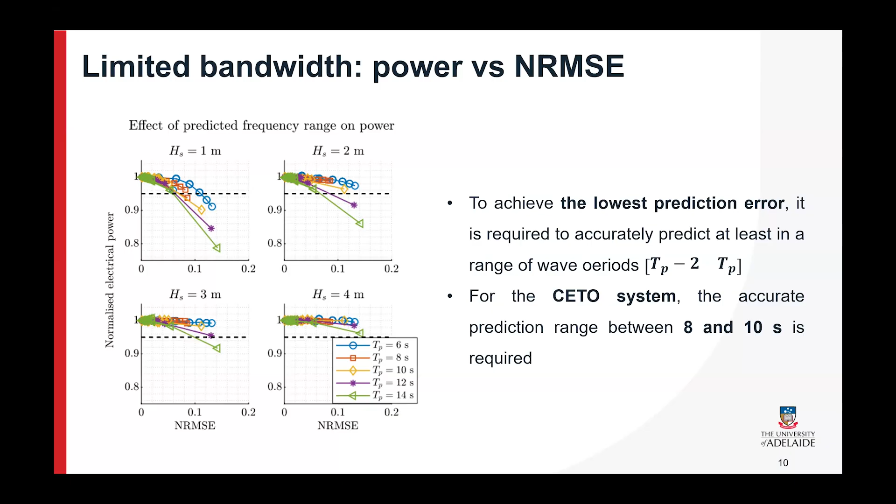Also, the power drop is not as significant for higher sea states as for lower sea states. From this limited bandwidth study, it was clear that if we want to accurately predict waves, we need to predict the peak wave period for that particular sea state, and maybe 2 seconds below that. For the CETO device in particular, we need 8-10 second period waves to be predicted accurately to stay within the bounds.

The last source of error I investigated was prediction noise. The wave elevation used by the controller is the same as the wave elevation going to the device, plus some noise, which is delta eta. We modeled that noise also following a JONSWAP spectrum.

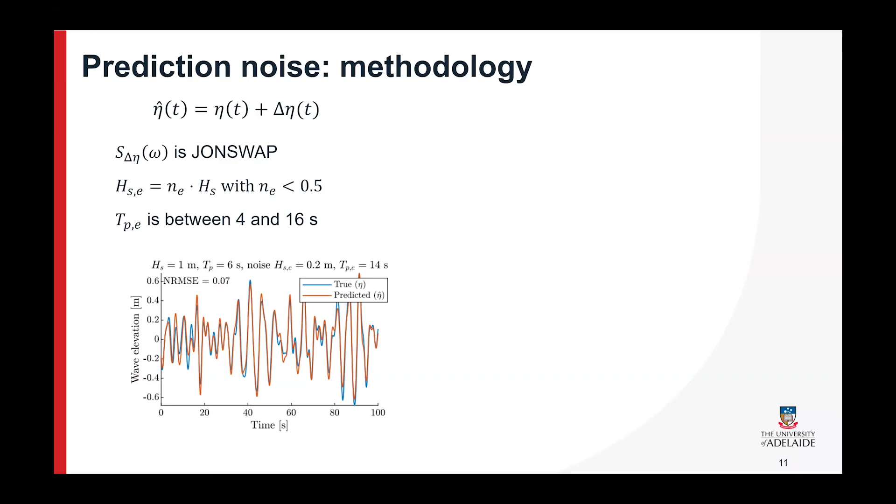We varied across different peak wave periods of the error, between 4 and 16 seconds, and significant wave height of that error up to half the significant wave height of the sea state. This example shows the true sea state is 1 meter and 6 seconds, while the introduced noise was 0.2 meters and 14 seconds.

It was interesting to vary the parameters and find the relationship between the prediction error and the noise parameters—significant wave height and peak wave period—but actually all the curves converged to a similar relationship, not particularly useful on its own.

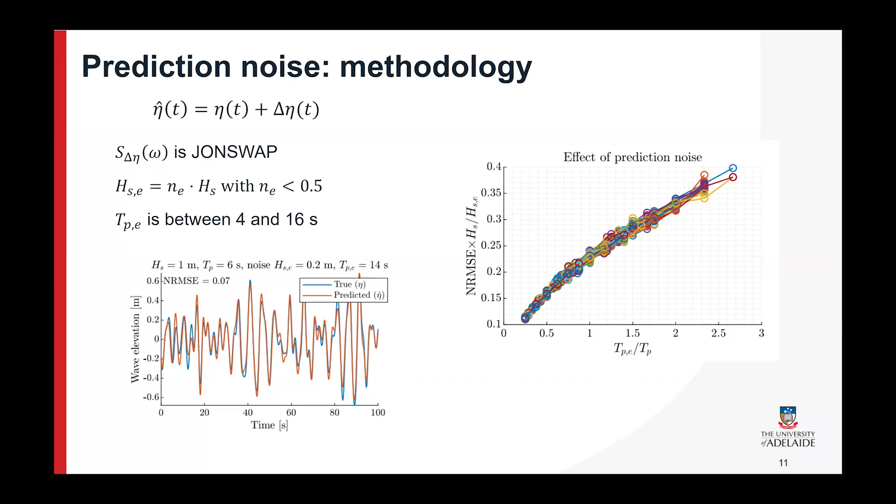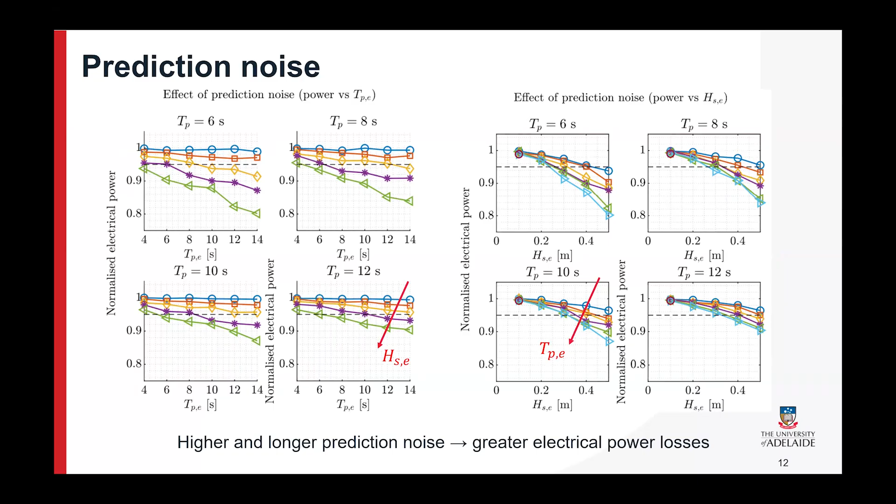This plot is also busy, but the key point is that it shows how electrical power production depends on noise period and noise wave height. It was clear that the higher the additional waves inside the prediction signal, and the longer the waves, the greater the electrical power losses become.

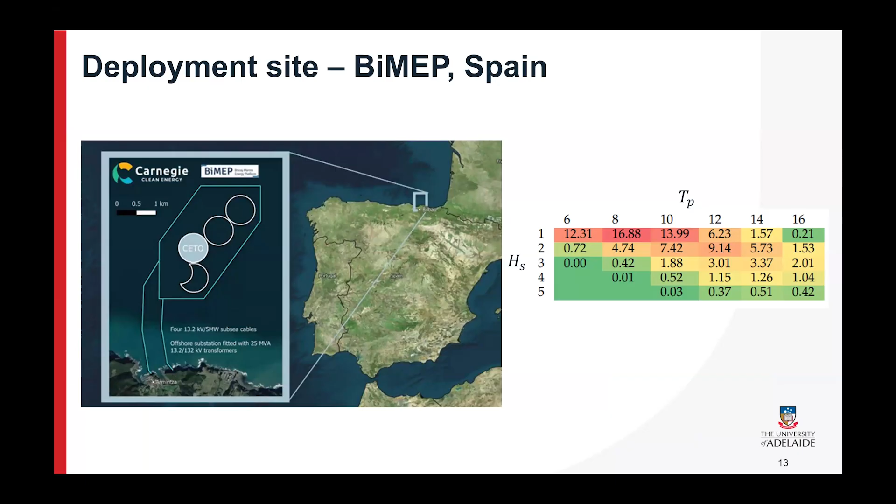So all those studies, lots of simulations and so on, but we needed to come up with only one magic number for this particular study. Carnegie's device will be deployed in Spain at the BIMEP site, which you can see on the map on the slide, and the most occurring sea state is around 8 seconds and 1 meter.

So in order to have a power loss not more than 5%, prediction error should be within 9% and not more. The time delay should be less than 0.4 seconds. We need to accurately predict within 8 to 10 seconds, and prediction noise should be lower. If there is any noise in the prediction signal, it should be less than a third of the significant wave height.

But also what was important to understand is that all of that study was done based on empirical data, empirical understanding of how the wave elevation error looks like. It was a study done by the University of Western Australia, where they used an array of wave buoys to develop and test the algorithm, which is a physics-based algorithm. That wave array was deployed out of Albany, if I'm not mistaken.

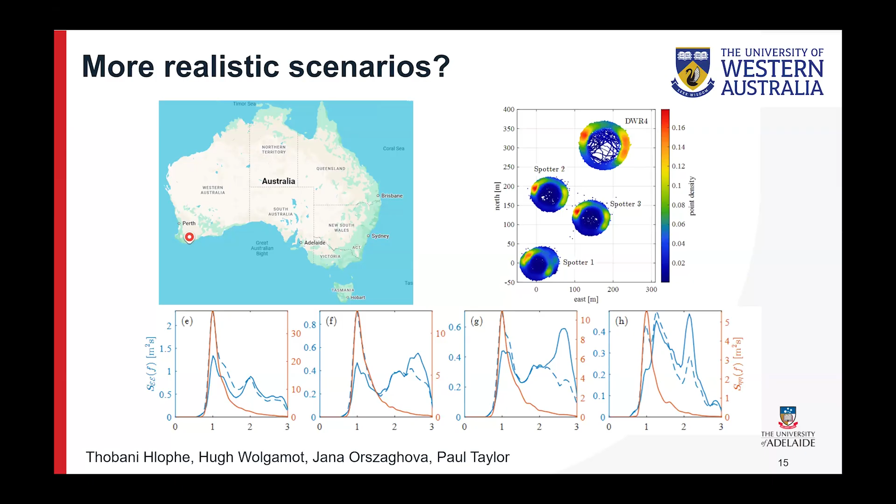I think that's it. Thank you very much.